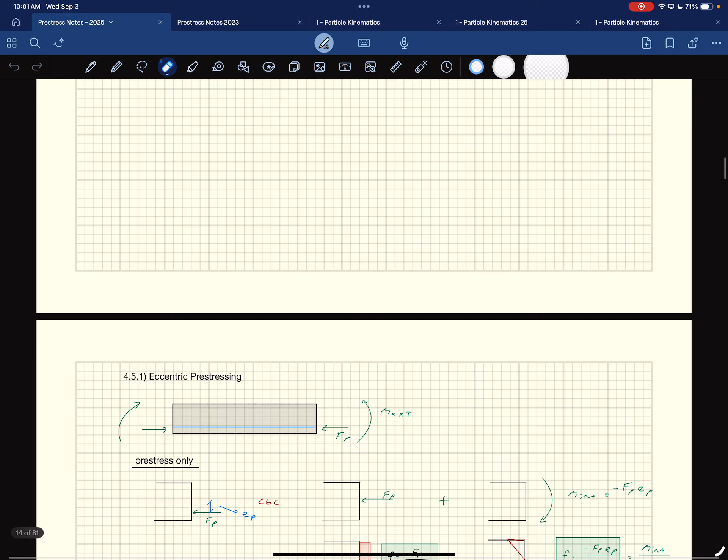So, okay, should we do this? Keep going. I will admit this now, I do have a YouTube page where I'm posting all the recorded lectures. I was going to keep it secret because it's for Neil, since Neil has practice until 10 and comes in late every day. I set this up for Neil, and I was like, I'm just gonna keep it.

Because I ran into a problem - I recorded all my lectures in Structures One last semester. When I had you guys in Structures One, you came to class and did it responsibly, but last semester it was like half the people there at all times. The rest just were like, screw this, I'm not coming. So I was like, fine, I'm not ever doing this again. I mean, I'll do it for dynamics, but anyways, this is the long story.

But I will put it on there. But you guys got to keep coming to class. That happens where, like, Kira for instance is not here today. She had an appointment, so she's like, 'can you record class for me?' I was like, fine, that's fine. And then sometimes you have legitimate reasons for not being here, so just keep coming to class.

Maybe I'll make a wheel. I'll make a wheel for you guys too, an attendance wheel that we could go with, so it'll give you incentive to come to class, because it's better since then we can actually have conversations.

Soonish, we're going to put together a tour. We just do that every once in a while, just for the heck of it. I think what we're aiming for right now is that building downtown - it's a podium structure, they have the timber being put on top right now, it's starting to go up. So sometime in the next couple weeks, we'll probably go to it.

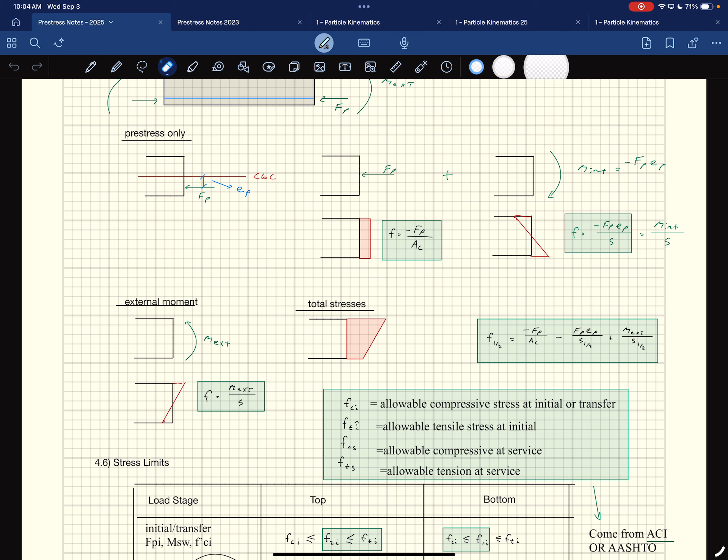So, okay. So what we covered last time, quick little refresher. Basically we derived the equation - this is the equation that we're going to use.

It's the pre-stressing force divided by the area of concrete, minus FP times EP over S, and it's S1 or S2 depending on if I'm going to the top or bottom with my calculations. Then the external moment, again S1 or S2 depending on if I'm going up top or bottom. So this is the portion associated with the pre-compression from our pre-stressing. This is the moment, the internal moment caused by the eccentric pre-stressing tendon. And then this is the cause of the external moment. And that's it - that's the only equation we need to use.

And like I said before, the mechanics are really simple, but where it gets complicated when we do our designs is, one, what do we use for FP? It depends on which load stage we're in.

If we're in the initial load stage, when we transfer the loads from the pre-stressing into the concrete, or when we post-tension the member, this is not going to have pre-stress losses in it. So it's going to be the full pre-stressing force.

Later on, when we're looking at 28 days out or beyond—5 years actually is what we designed for—we're going to use a different FP, the effective pre-stressing force that accounts for any pre-stress losses that happen. So these FPs are going to be different depending on which load stage we're looking at. The other thing that's going to change that we'll talk about today is EP.

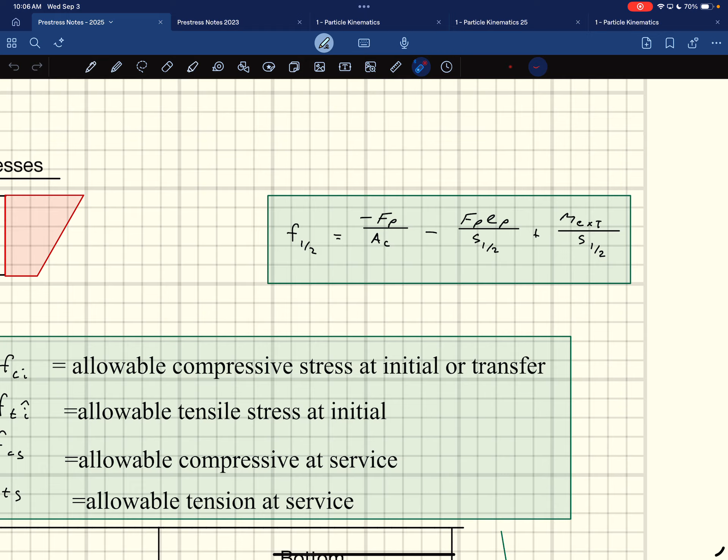The other thing that adds complexity to this is what do we use for comparison? What are we comparing these stresses to? What we're comparing them to is allowable stresses that ACI prescribes, or whatever building code you're looking at prescribes.

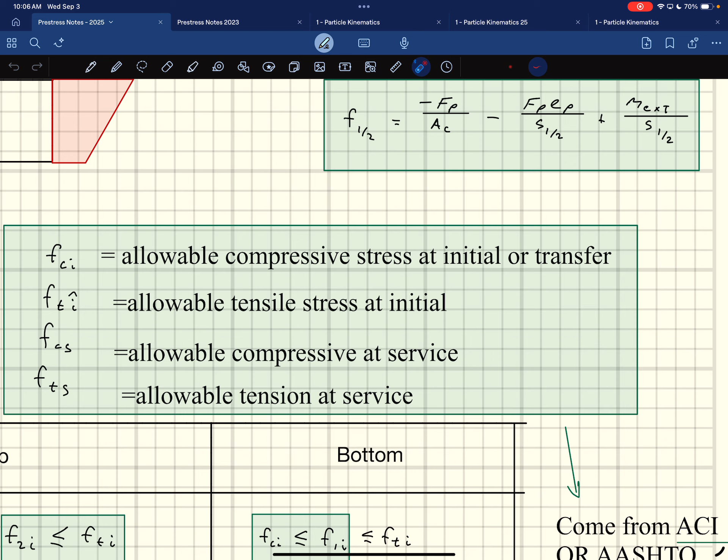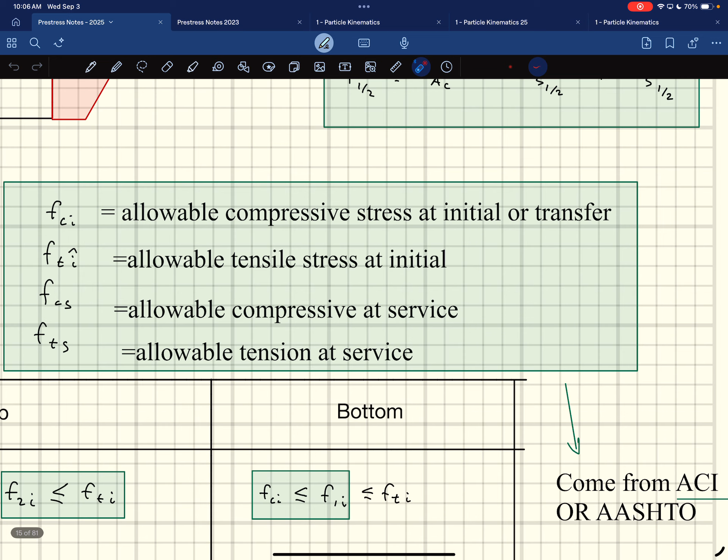If I'm looking at compression at the initial stage, that's going to be FCI, defined by ACI. FTI is what the allowable tension stress is, at the top or bottom, depending on how this thing is oriented, and if it's simply supported or whatnot. This is my allowable compression stress during service loads, and this is my allowable tension stress during service loads.

At every location under both these loading conditions, the initial and the service cases, we have to make sure that our calculated stresses from this equation are more than FCI and less than FTI.

This whole thing takes into consideration that FCI goes in as a negative number, sticking to our sign convention. So this would go in as a negative number, this would go in as a positive number, and then our stress has to be between that negative and positive number. Same thing here—it's the same limits.

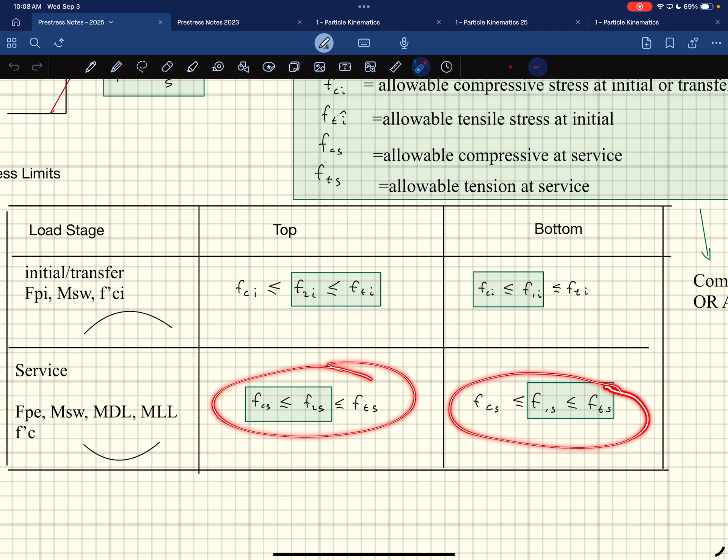These are written exactly the same, but what will control, you could apply a little bit of logic. In a case where this thing is popping up under the initial transfer, what's going to matter is tension up at the top and compression down at the bottom, because this thing is curved up. Under service conditions, again these are written exactly the same, but what would control under a standard case would be compression at the top and tension down at the bottom.

That's it—you always just have to make sure we're within those stresses. And like I said, it gets a little more complicated by all the other stuff that's floating around.

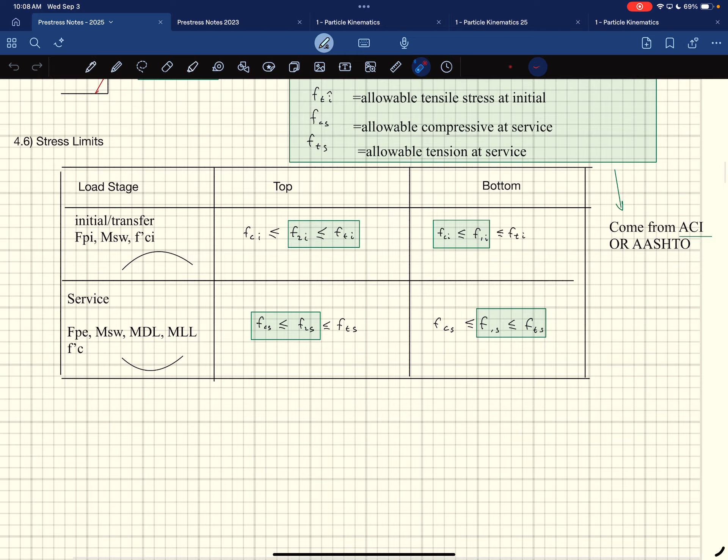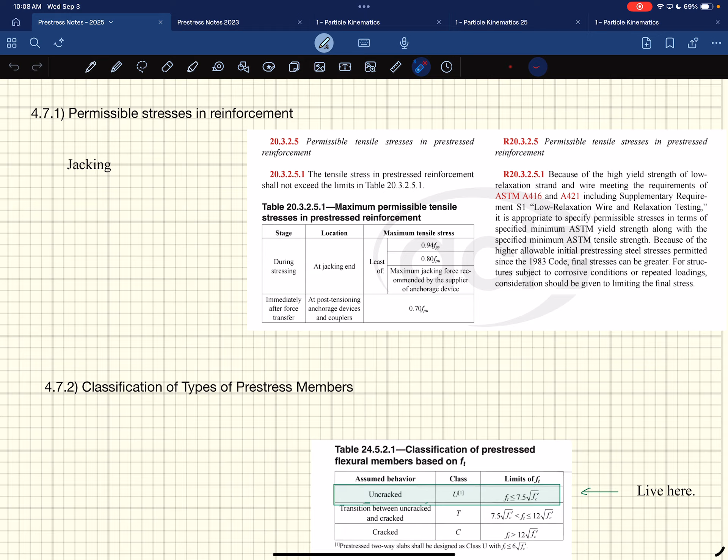So then we went in and said, well, what are those things? We looked at the jacking pre-stressing forces, essential to the tendons. These are the most stresses that the tendons are going to see when we load them up.

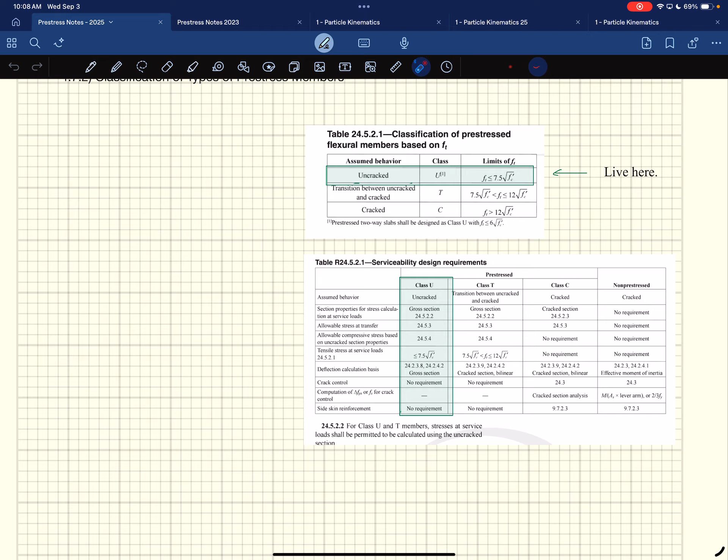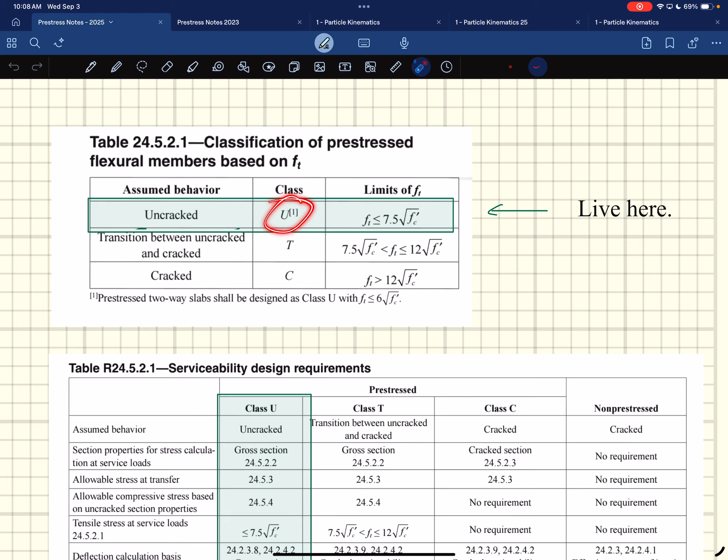Then we went in and looked at classification. We're going to deal in this uncracked case. Depending on your classification, which is based off of your tension stress under service conditions, as long as it's less than 7.5 square root of F prime C, we call it uncracked. When it's uncracked, it tells you how to go about analyzing it, and then we're going to stay away from the class T and the class C.

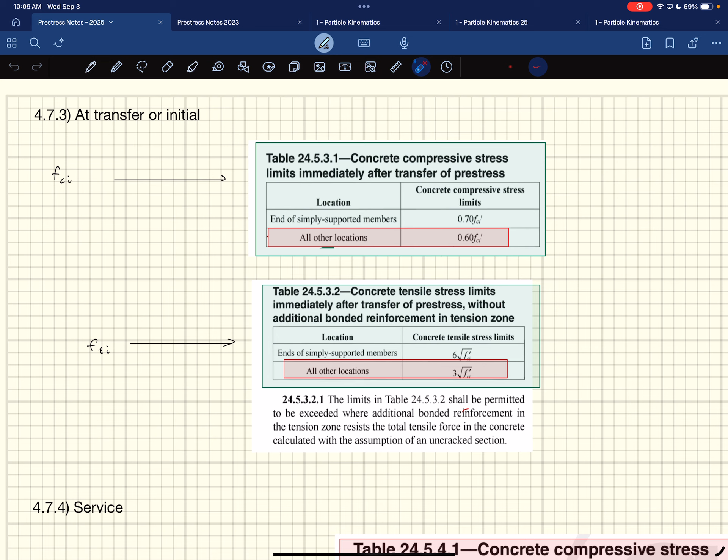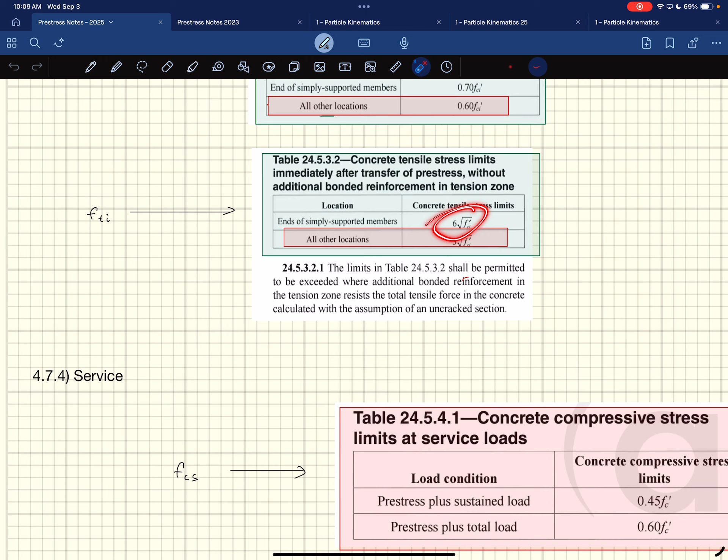And then we went through and defined what FCI is, right? We're going to stay away from the ends, we're just going to do all other locations. That's the 0.6 F prime CI, but near the ends we can go a little bit higher. FTI is again all other locations, but we have a bit higher limit out there. So it actually defines FTI and FCI, and they're both based off of F prime CI.

And now F prime CI even - it's the initial concrete compression strength that we expect to do the transfer at. That would be given to you in the problem statement. Then you would make sure you stay less than 60% of that at the beginning, and you would calculate 3 square root F prime CI to determine what FTI is. And again, when you see the square roots, that F prime CI has to go in PSI - you gotta be careful of that.

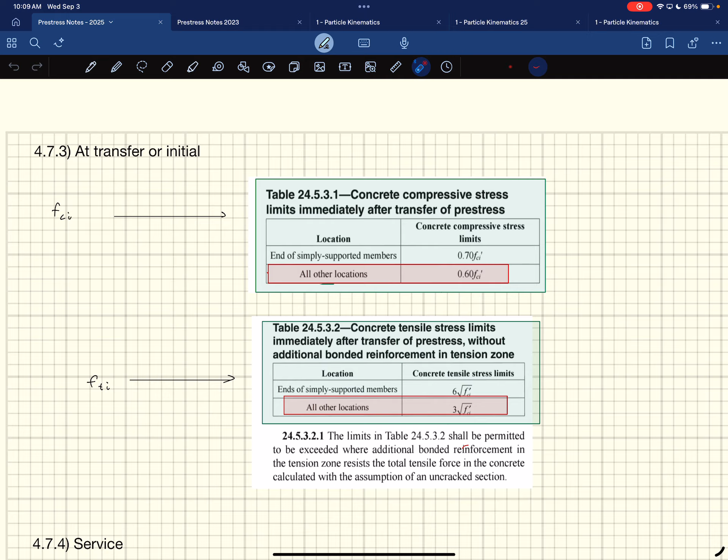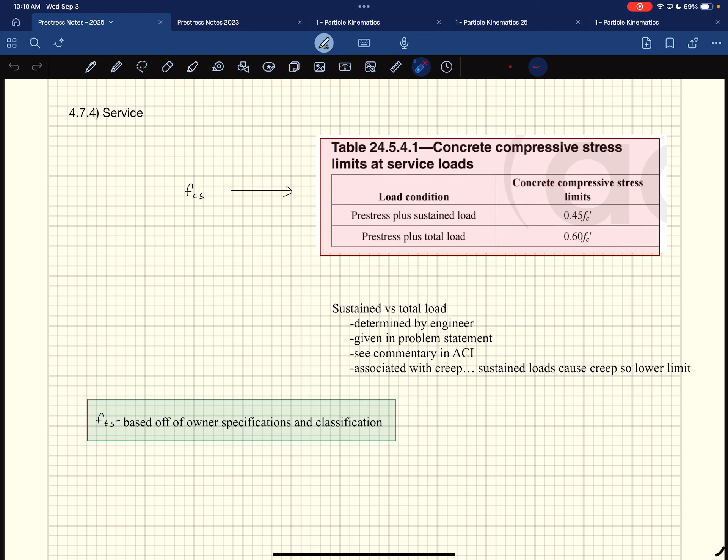FCS has 2 different limits depending on if you have sustained load or not. We have a lower limit for the sustained load because of creep, and a higher limit when we take into consideration the total load, because that includes the live loads that come and go and aren't there constantly. So those are the allowable stresses - we just need to make sure we stay within those limits. I'll show you, we're going to dive into actually analyzing one of these in a second.

Okay, so we have basic strand patterns: straight, or standard, just as a constant EP.

What up, Neil? Mike. How you doing?

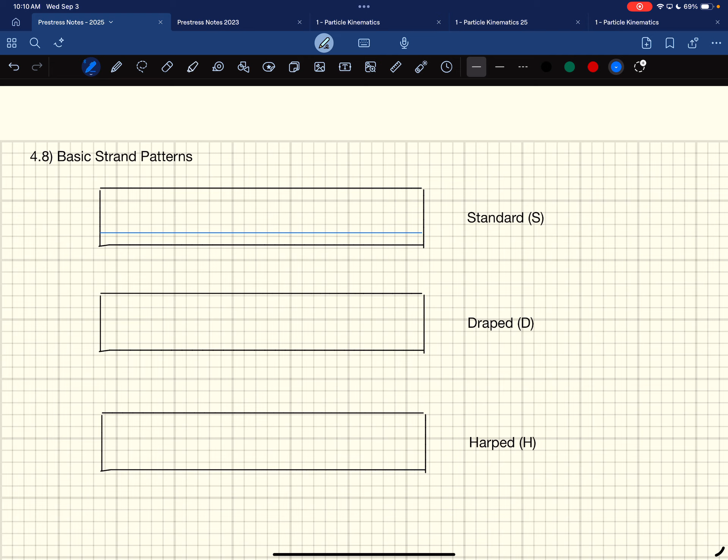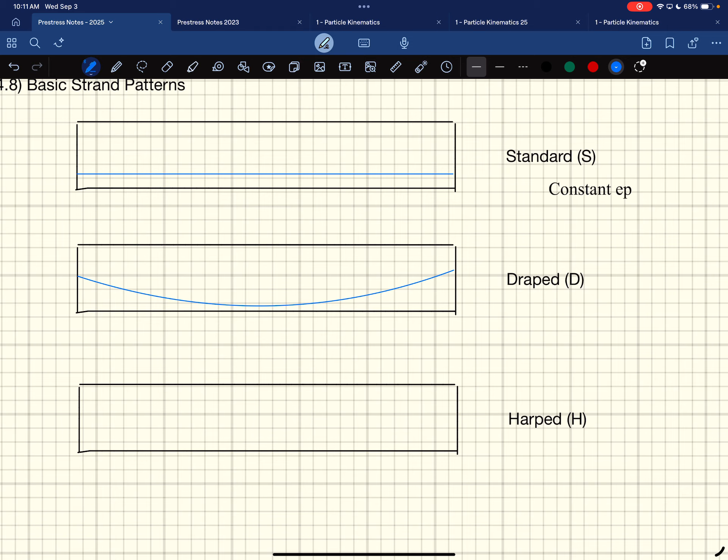Draped, like that. And I think we're going to estimate that as like a parabolic shape, like in a lot of equations - it's not really a parabola. It's a funicular shape, the shape that a cable would take if you draped it between 2 points, letting it sag as it goes. It's not a parabola, but it's close enough. Some nerding out there a little bit - funicular.

This obviously is post-tensioning. It's important to note you couldn't make this shape with pre-tensioning. With pre-tensioning, you stretch it first, then cast the concrete. You can't stretch a cable into a curve - I mean, you could try, you could put a bunch of tie downs along the length of this thing, but it would still be straight lines in between each one. So this would be post-tensioning.

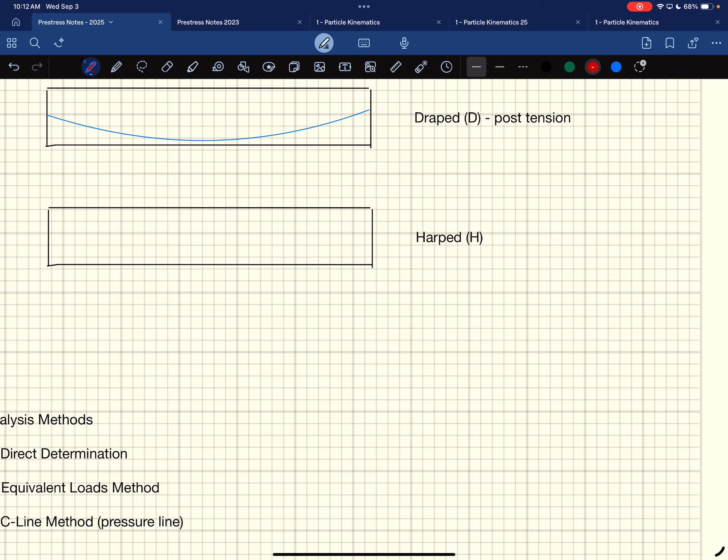And then we have harped as the last one. There's a couple different harping methods, like this. You can also do it where you just have one harping point, right in the middle.

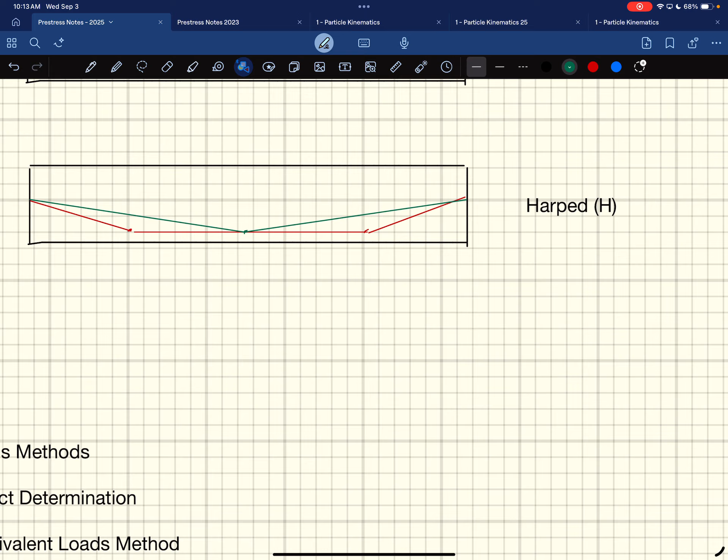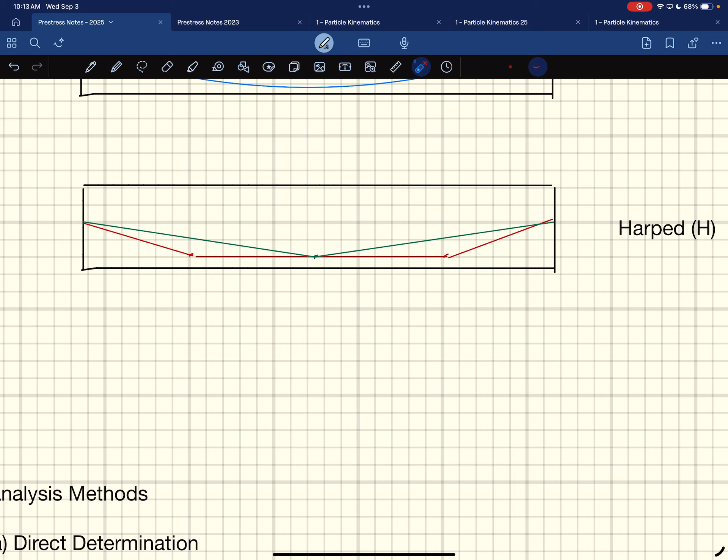You have a couple different depression points, where you hold it down, and you could do that. You can imagine doing that in a pre-stressed plant - before you cast the concrete, you just put some big tie downs right here, and then you pull this sucker. But imagine the forces you're going to be getting at this location - there's massive forces when you do that. When you're pulling on this thing with millions of pounds in this direction, it's going to want to shoot up, so you have to hold it down.

Like I said, there's a pre-stressing plant in Billings - we've toured that a few times. And the people at the plant don't like it because it's really scary. You can imagine, millions of pounds, and if this anchor fails and this thing shoots up and chops people's heads off. I don't know if it actually ever has chopped anyone's head off, but I wouldn't want to be the first.

We've talked about this - I was a big TikToker for years, and then it was too good, it really sucked me in. I was just like, oh my God, this is too engaging, and I had to quit it, I had to quit my TikTok. And the algorithm was bringing me towards this extreme political content. I hated it, so I was like, I'm off, and I switched over to Instagram Reels because they suck.

They suck. But then immediately I started getting some of the craziest shit on my Instagram Reels, where people were getting their heads chopped off, or crashes, lots of shootings. You just watch people get shot on the sidewalk, going off big ramps and wrecking terribly. What the fuck, right? I had to keep saying, I don't like this, I don't like this, I don't like this. Now finally the algorithm has gotten to a point where I don't get those death shots anymore. But I was like, shouldn't this be illegal? Am I supposed to be seeing people die all the time?

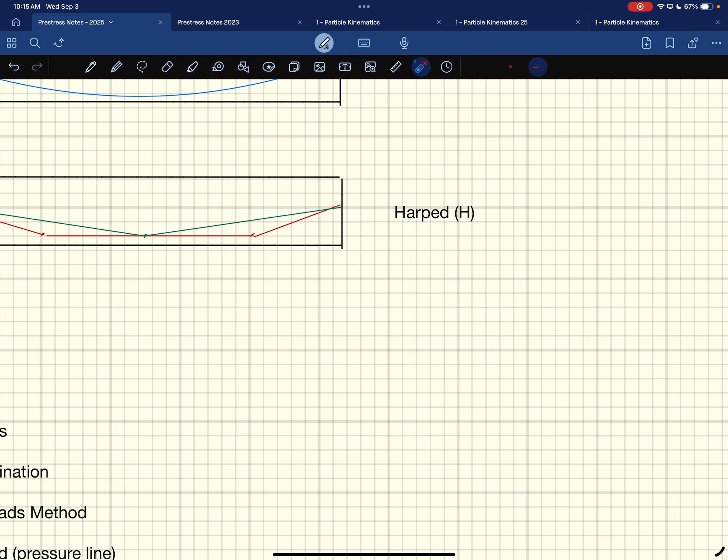I got this one page that would show an accident. I went and looked, because I got the reel and then I went and looked, and maybe that's why I kept getting them, because I kept engaging with them. It would show a fatal accident, and then right before the fatality happened, it would cut away. You'd see it happening, but they don't actually show it. I was disturbed for so long seeing those ones. There's one where a guy was dealing with these big wheels and tires on top of his trailer, and he was overdoing something with it, and it fell off and swung around and squished him, but it cuts away right before that happens. So it was like, oh my God, what's the next one look like? And it just kept going.

That was too engaging. But now, part of the reason my algorithm has been corrupted, it's been helping too. I got rid of that stuff. It's because my wife constantly sends me reels, and her reels suck, they're terrible. But they corrupt my algorithm, and they're also very wholesome.

I'll give you an example someday, I'll find one she sends me. My kids won't open reels from their mom because they don't want their algorithm corrupted by their mom's junk stuff. But I take it for the family and look at it anyway. It's like, all right, here we go. That's funny. That's a good one, I'm gonna send this recording to her.

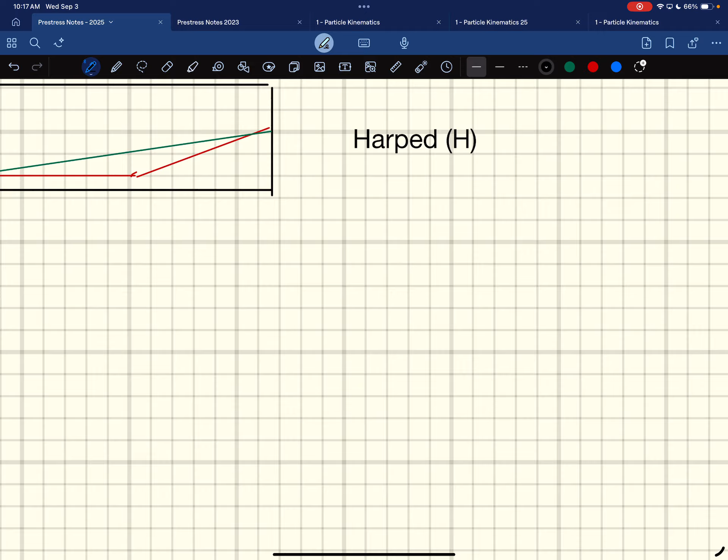Yeah, we had a term for that. I forget what it was.

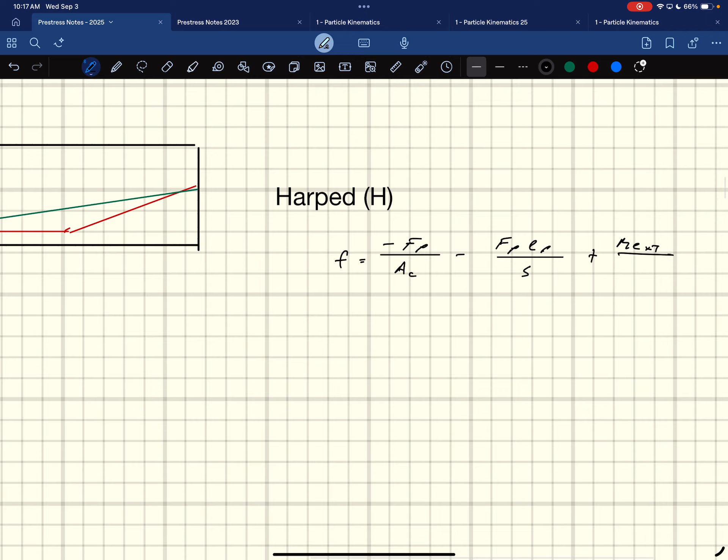All right, so just to write our equation: this is F. Why are we doing this? Right, why are we doing this? This is FP over AC, minus FP times EP, all over S, and then we're adding on M external over S. And I mentioned this before, what we're doing is we want these to cancel out.

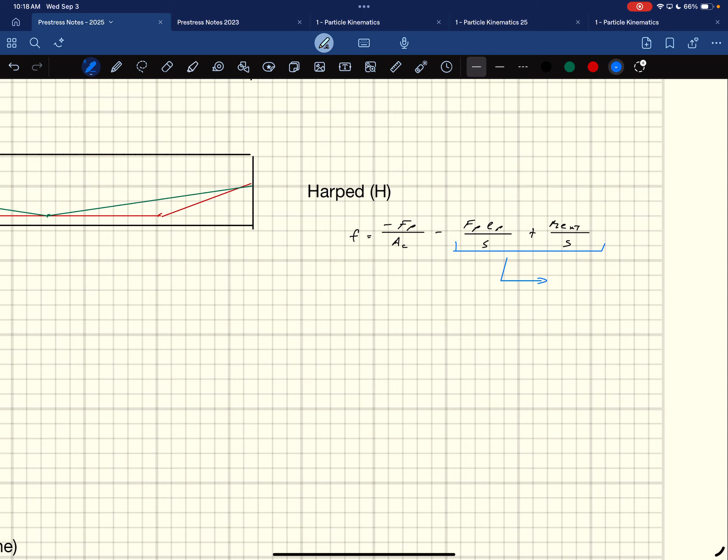Because again, what I want is the pre-compression force. But ideally, if you could do this perfectly, I want my external moment and my internal moment to cancel out, so that I'm just canceling out the effect of the external moment. Because if I do that, then I'm not going to get any tension. The only thing left is compression along the whole cross section.

Well, what does our external moment look like? Our external moment actually looks like this, under a standard simply supported case: it's a parabola that goes this way. So if I make my tendon go like this, EP, it'll basically make it so those two cancel each other out—my external moment, my internal moment cancels out. If you're doing pre-tensioning, I can't make this shape, but I can do this: I can make it more eccentric where I need it more eccentric, and less eccentric where I need it less eccentric.

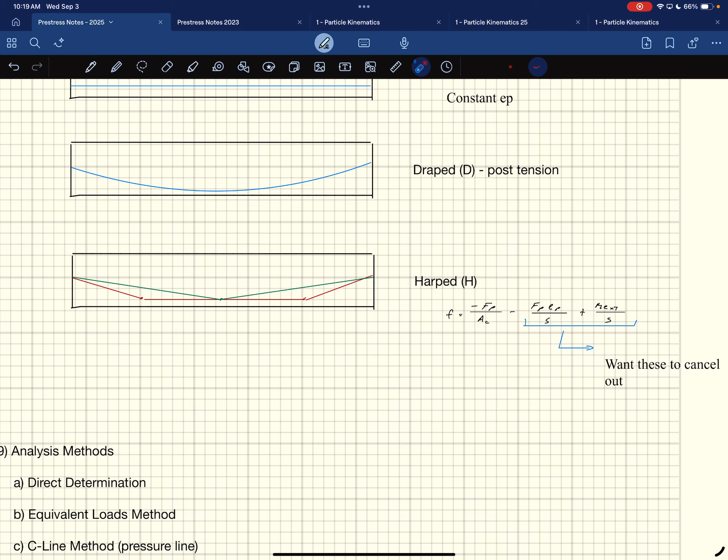And we get these two things to cancel out. And that's great, right? I want to cancel out. I mean, this will do it. We put it down at the extreme location right there, and this is going to do it. Where it counted the most, my internal moment and external moment would cancel each other out.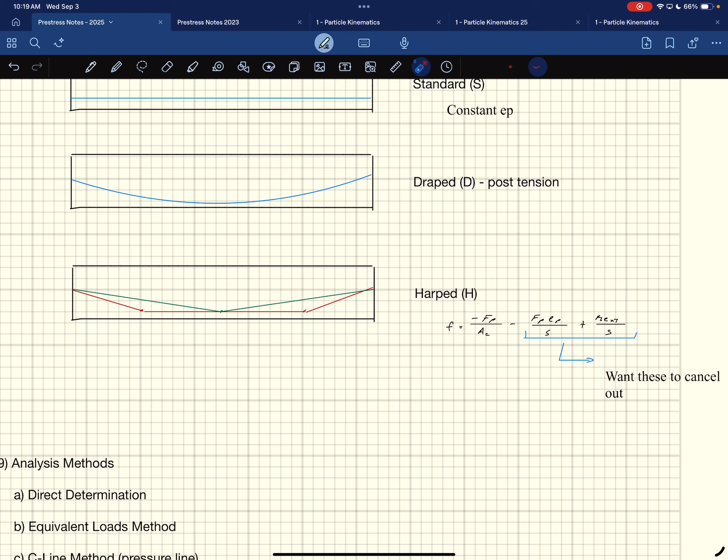Where you actually can run into problems is near the ends, because over there isn't much external moment, or the external moment is really small. But I have this pre-stressing tendon out there that's trying to cancel these things out. Well, if this goes to zero and this still exists, I can run into some problems, like cracking up at the top at the ends, because I don't have the external moment to cancel it out.

I don't have my moments shaped like this - I have no moments at the ends. If I don't have any moments at the ends, and I have this big pre-stressing force saying you need to pop up, I could get cracks at the top near the ends. Near the middle it's fine, but near the ends I could run into some problems.

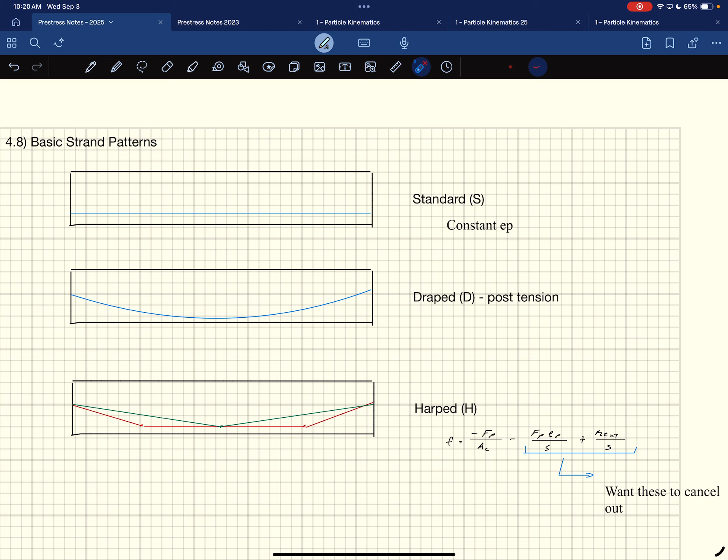And there's some ways to avoid that - we just have that thing change. Have it have no eccentricity at the ends, and then have a major eccentricity in the middle, right? And that's what we do. I think a lot of times, though, they do get designed as straight just because it's easier, right?

If you're making these things in a pre-stressing plant, just make it straight. What do they do in post-tension floors? Remember I said that the ducts and the pre-stressing tendon are kind of one unit. What they do is they lay it out on a floor, and sometimes it's going over a bunch of beams, so sometimes you want positive, sometimes you want negative, and they just literally lay it out and drape it as they go across, and come back and cast concrete around it. In one second, I'm gonna show you.

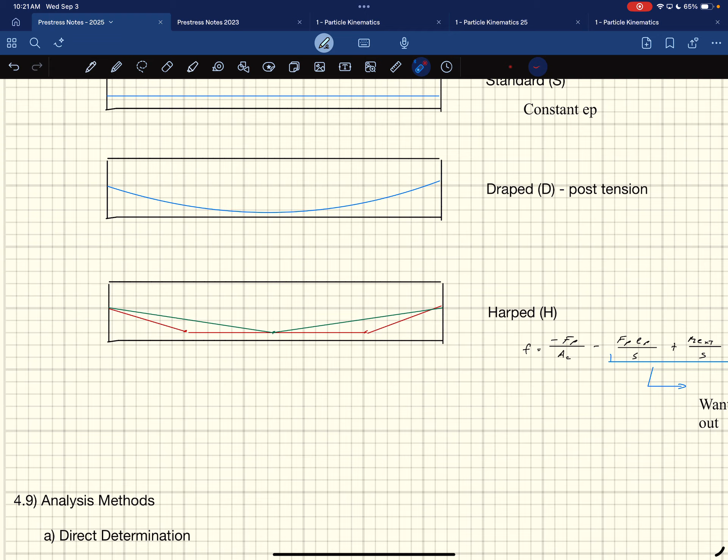Axel, you remember Axel? All the way from last semester? What's crazy though is I say that, and those of you that had classes with Axel, you know Axel. Those of you that didn't, like some of you, Paige, do you know who Axel is? See? It's how quickly you get forgotten around here, right? I'm serious, that's really strange. We've had professors here - Ted Lang was a professor here for 50 years. You guys don't even know who Ted Lang is, right? And he was forgotten within the first years. Everybody's like, I don't know who Ted Lang is, because you guys are always changing, right?

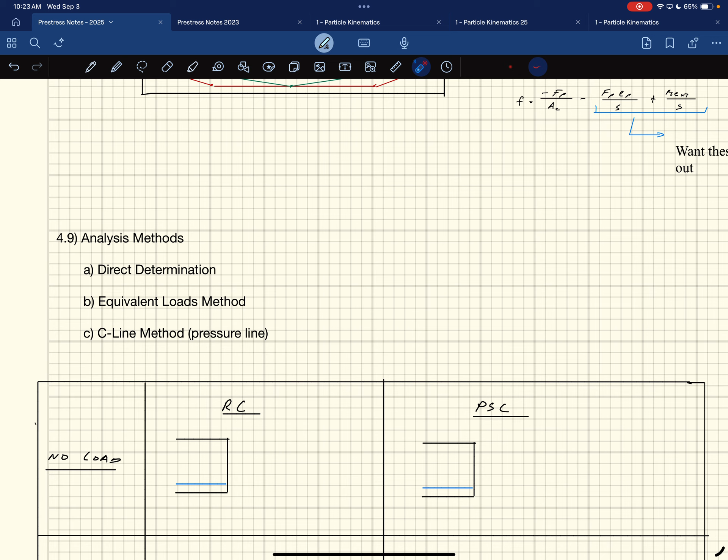Relevant. What we do is relevant. That was my establishing point. This happens, right? So they're going up and down as you go along. And the moving them up and down is still doing this, because what's happening is my external moment is going positive, negative, and so my EP is going to go below in some cases, above in others, as it goes across.

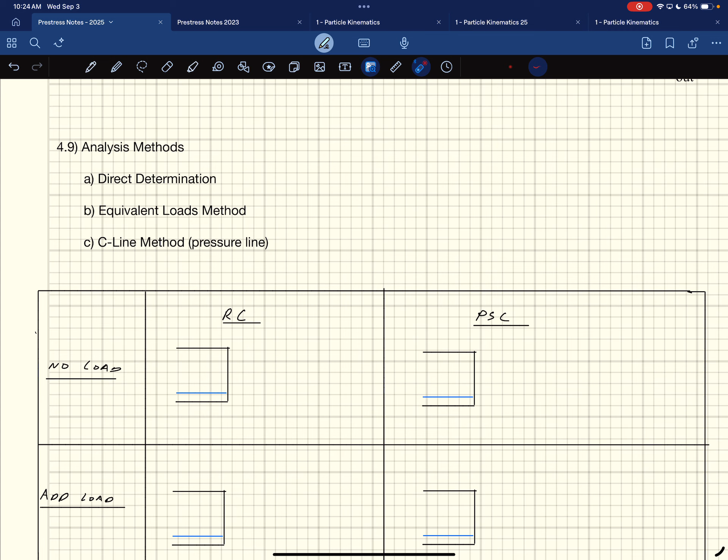Okay, so how do we analyze these things? There's a couple different methods here. We're going to briefly talk about it. We're going to focus mainly on this one. This is just analysis, not design at this point. We're going to do direct determination. That's actually what we're going to do. We'll talk a little bit about the other ones too, just to lay them out so you know they exist.

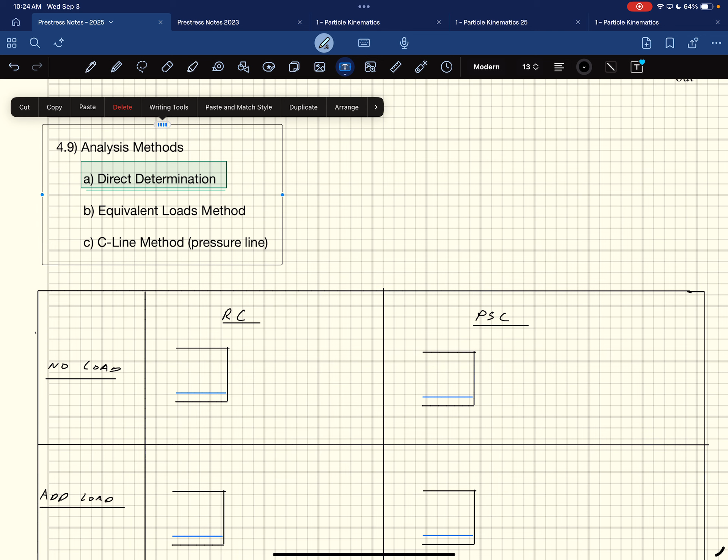Use equations from above to calculate stresses along the length, at different load stages. It ends up with quite a few lines for this, but we use equations above to calculate stresses top and bottom along the length for different load stages. And you can imagine this is going to be a plot of stresses as a function of x.

We're going to do this in a minute. I just wanted to give some foreshadowing, because they're changing along the length, and so they're going to have that, okay?

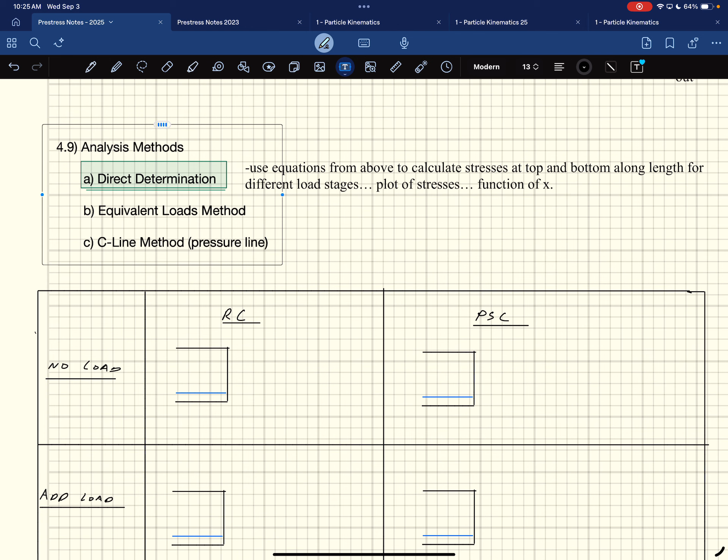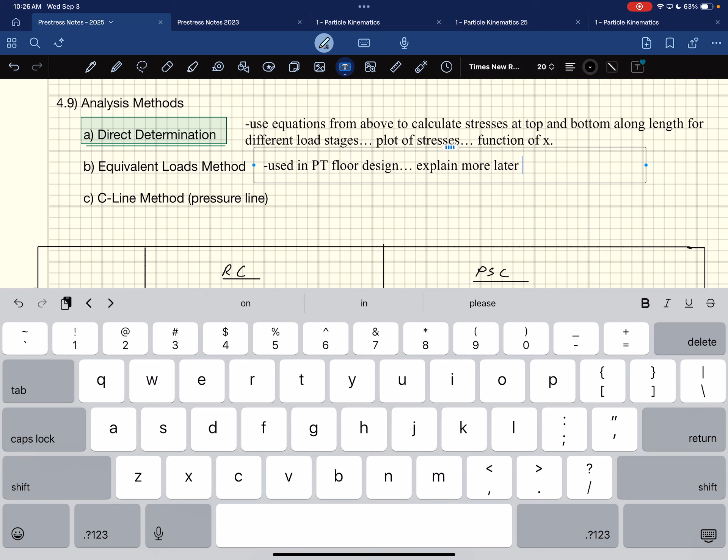Equivalent load procedure: this is used in post-tension floor design, PT. We'll explain more later. What that does, as the name implies, is it comes in and starts talking about what could be an equivalent load that would give me these same moments. An external load, you pretend that there's some external load, so when you analyze it, you just add in this extra component, like another distributed load. It's not really there, but it's a distributed load acting in the opposite direction.

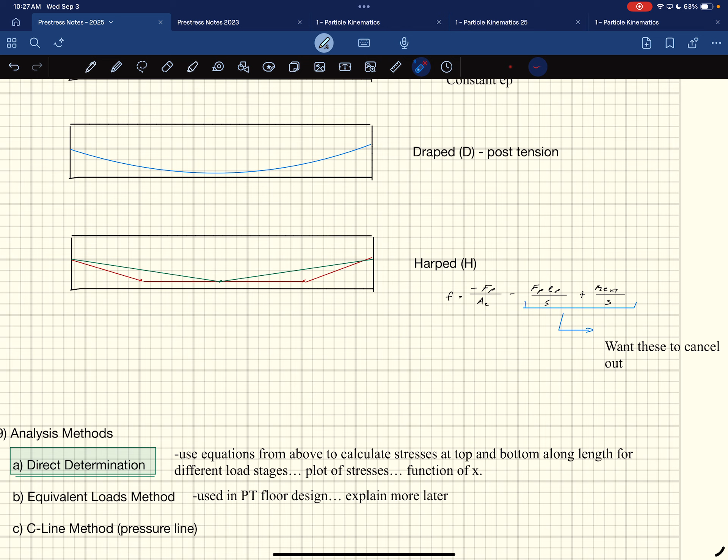For this case, we could say this pre-stressing is going to cause a parabolic internal moment. So you would come in and say, let's just pretend that's a force, a distributed force with an upward magnitude that would cause that same thing. There's some reasons for doing it - we're going to get into more detail later - but it has to do with trying to analyze things with finite element analysis. Finite element analysis doesn't know how to handle a pre-stressed member, but it does know how to handle external loads. So what we do is pretend that there's just an external load that causes the same moments that this thing would cause, and we go from there.

Getting ahead of ourselves, okay? And then there's also this last one. This used to get used a lot, the C-line method. And a few years ago, people thought it was really funny because they kept thinking I was saying sea lion, like a sea lion method. So now I say sea lion on purpose. Right? The sea lion method.

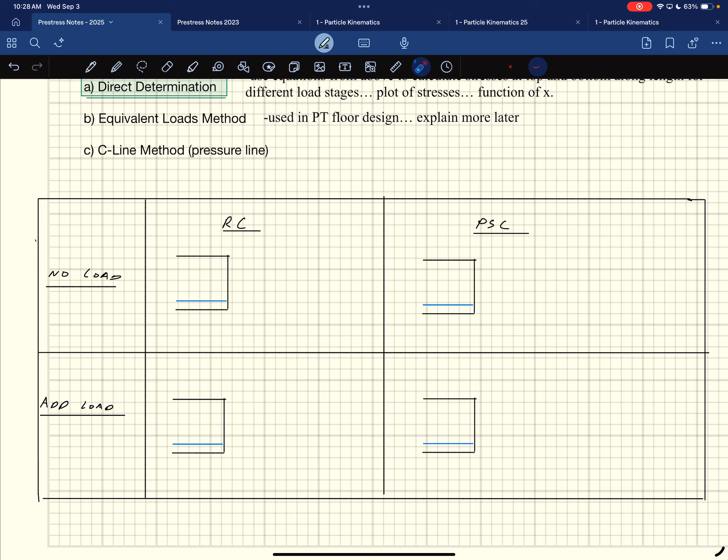Shit! Oh man, shots fired! Oh God, I thought you were setting up like a pun. No, I'm really curious. I look at it and think, oh, look, it's a seal. And then it's a sea lion, dumbass. Anika's probably the one yelling at it. It's funny because I do the same thing, like when people go to Yellowstone and say, oh look, there's a wolf, and it's clearly a coyote. I'll pass judgment on that, but you don't pass judgment on me, Anika, all right?

Same thing with a llama versus an alpaca. You guys know the difference between those? They're different animals, I know this. But could you actually look at one and tell? If I put them both up there, you'd be wrong, Neil. I look at alpacas all the time over by Granny's Donuts. How does it look different than the hump on a camel's back? Not a camel, I'm not a camel. A llama and an alpaca - I know the difference between a camel and an alpaca, but I'm not sure about a llama and an alpaca. They have different feet, I'm pretty sure. Also a llama's bigger than an alpaca.

Maybe next time I'll set up a little quiz for you guys - maybe that'll be on the exam. There'll be a picture of a sea lion and a picture of a seal, and you have to identify which is which. How do we trust that your key is right? Yeah, AI. And then we'll do the same with llamas and alpacas and see if you can tell the difference. That'll be on the exam. Is that extra credit? There'll be pictures - maybe a llama, a seal, a sea lion, and an alpaca, and you have to match which one is which. And a camel, I'll throw a camel in there too, Neil.

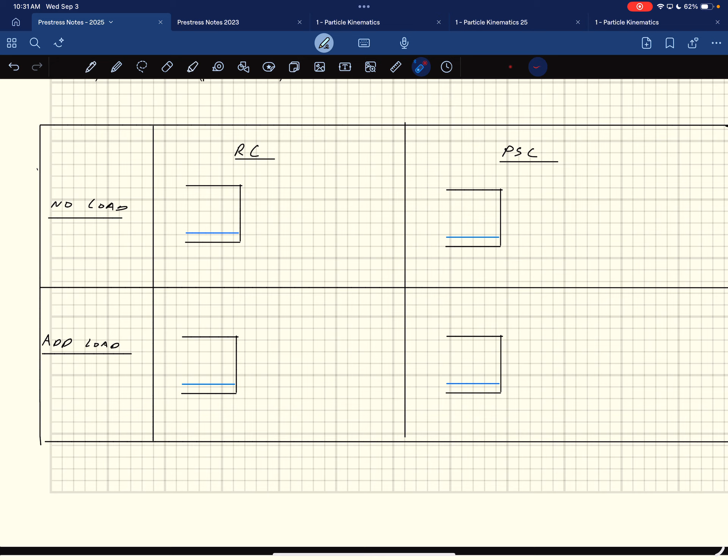A wolf and a coyote. A bison and a buffalo - what's that? Bison and a buffalo, they're the same, aren't they? Well, but we call them that, we use them that way, but we're wrong. A bison and a buffalo. A black bear and a grizzly - that's the hardest one. You should make it black bear and white too. What about cinnamon? Black and white for the... oh, black and white. What's that, Anika? A cinnamon bear and a brown bear. Yeah, grizzly would- yeah, grizzly. Oh yeah, this would be a great exam, it's gonna take a lot of animals.

Okay, so back to the sea lion method - okay, we're not actually going to use a sea lion method, but what I like about it is the discussion leading up to it, like the difference between regular reinforced concrete and pre-stressed concrete. They used to analyze pre-stressed beams this way. We don't do it anymore, because now we have computers and can do Excel plots or MATLAB plots of stresses really easily, so it's super easy to just do the regular method. But back in the day, when they didn't have those tools, they came up with other ways to picture what's happening.

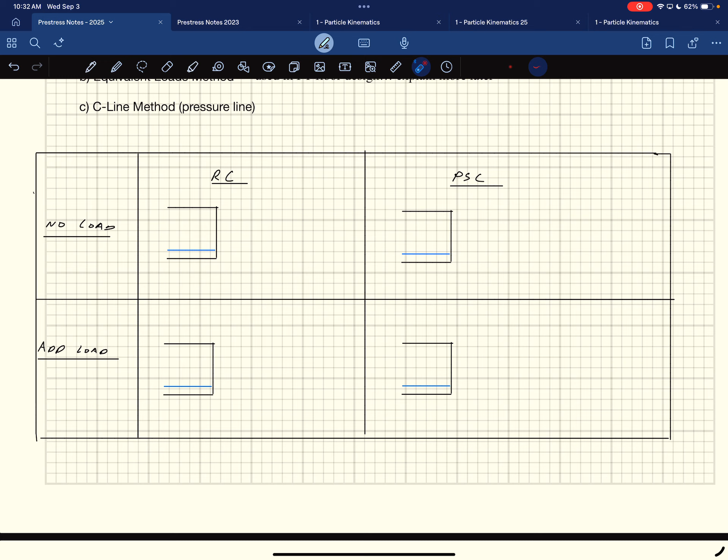So what we're going to do is compare reinforced concrete to pre-stressed concrete, that's PSC. We're going to look at no load, and then we're going to add some load to it. With no load at all, what are the stresses in the reinforced concrete beam? Nothing, right? It's just sitting there, it's passive. Obviously there's self-weight and stuff, but without any load, no self-weight, if you just put a concrete beam on this table, completely supported along the length, it just sits there. Nothing happens to it until I add load.

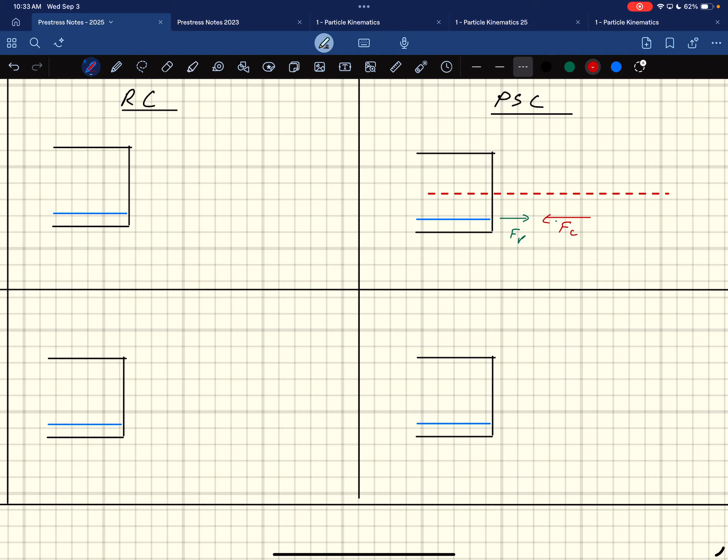Whereas a pre-stressed concrete beam, that's not the case, because they're preloaded, right? So it has some stresses to begin with. We've got FP, we're pulling on that pre-stressing force like that. And then equal and opposite is going to be FC, the resultant compression forces are going to be like that. And we've got the CGC in here, CGC floating around right there. This distance right here is what we're calling EP, dash line.

My eccentric pre-stressing force - this is what we call EC. If we were to calculate it: if I took this steel, stretched it down at the bottom, cast concrete around it, and released it, there'd be this massive pre-stressing force causing this. FC and FP have to be equal to each other.

FP has to be equal to FC, because the system has to be in equilibrium. So FP and FC are equal and opposite to each other.

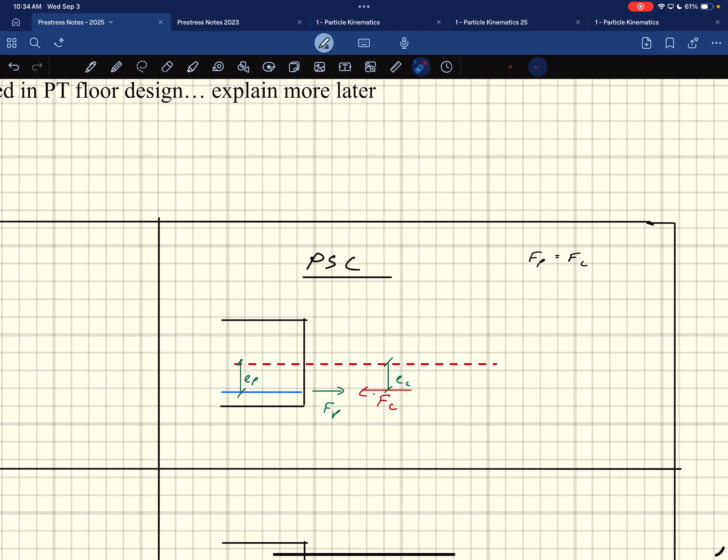Okay, so EC, EP - these things line up. They're right up next to each other, they have to be. There's no external moment. If FC didn't line up with it, if it was up here, there'd be a moment. At this point, there's no external moment applied to it.

So FP is equal to FC, and then also EP is equal to EC - the eccentricity of both of those things. If I was to find the central location of this, and add the EC to it, it would have stresses that would look like this. You could figure out where the resultant from these stresses would be, and that resultant would be lined up directly with that FP.

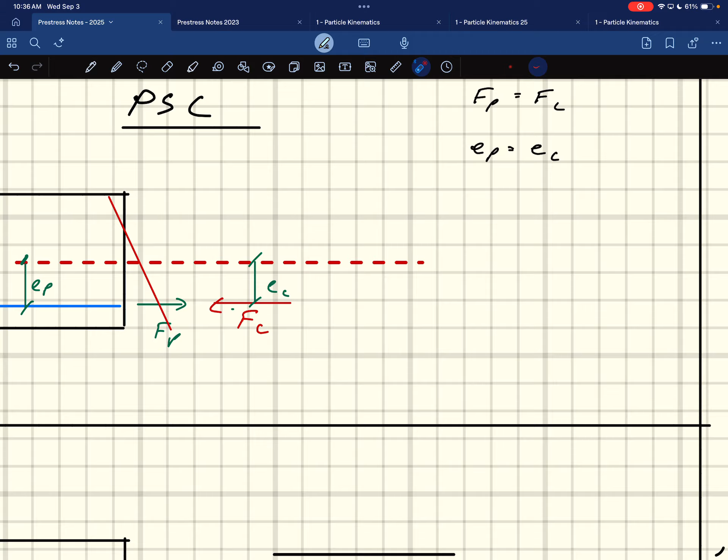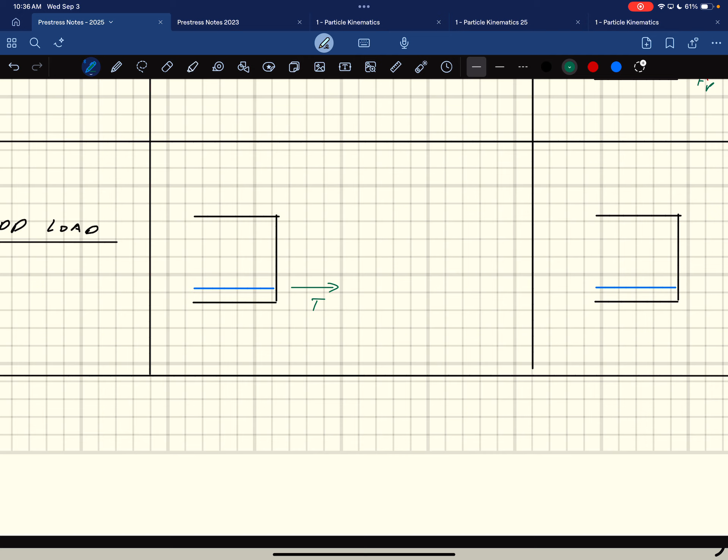But then if I apply load - that's what happens when we have no load. When we apply a load, as our load goes up, in regular reinforced concrete what we get is this: down here at the bottom we get T, and now I'm going to get a compression force up at the top too. C and T - in this case C is equal to T. That's fundamentally what we do in regular reinforced concrete.

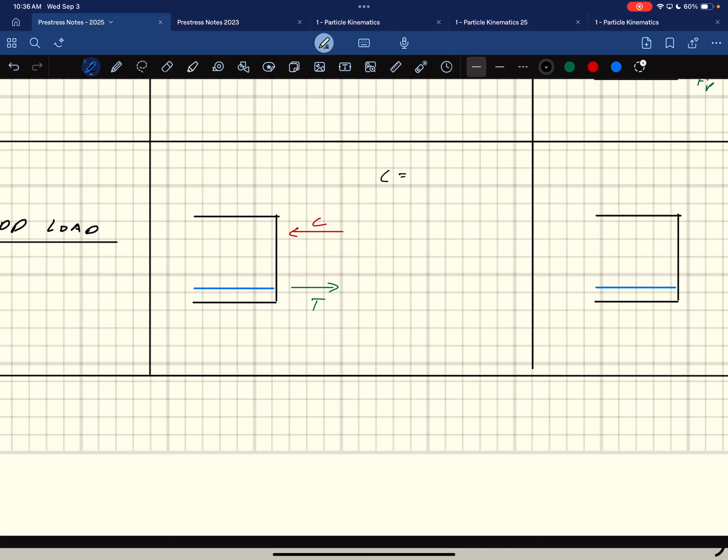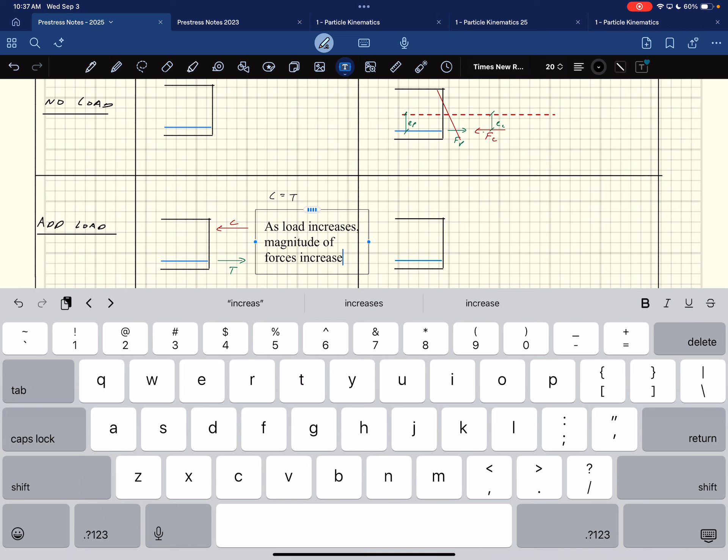But then the other thing that's happening, as load increases, the magnitude of forces increase but they stay in the same location. So to resist the load when you apply moment to the reinforced concrete, C always has to be equal to T because there's no other forces happening there. The moment comes from C and T getting bigger - C gets bigger, T gets bigger, up until it yields, and then T and C flatten out. Generally speaking, they stay in the same location and the magnitudes increase as we apply the load.

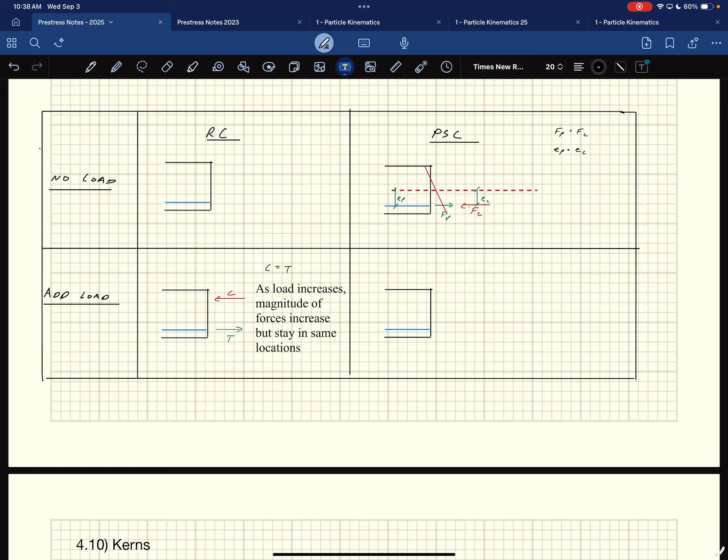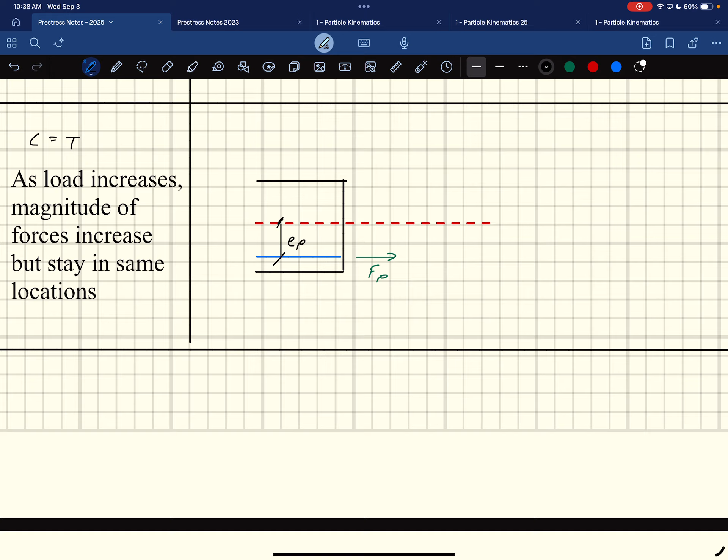With pre-stressed concrete it's different. Same things applied here: my FP is going to be down here, the pre-stressing force going like that, and we've got my CGC going down the middle again. My EP is fixed - it can be changing in height, but it doesn't change as we apply load.

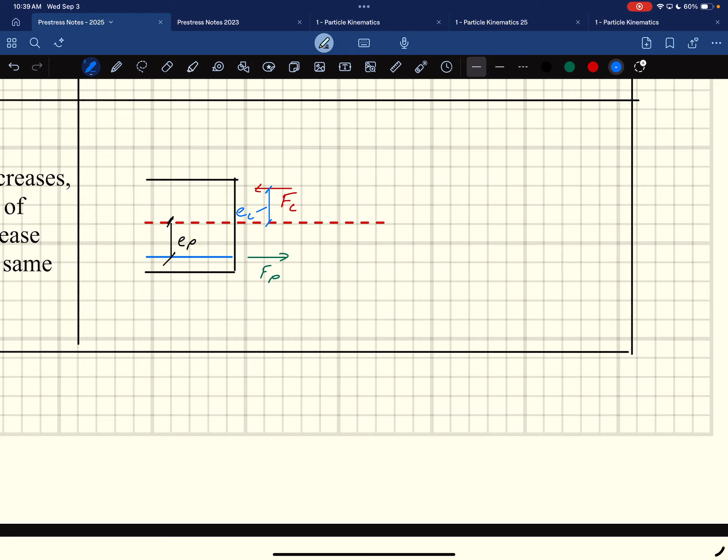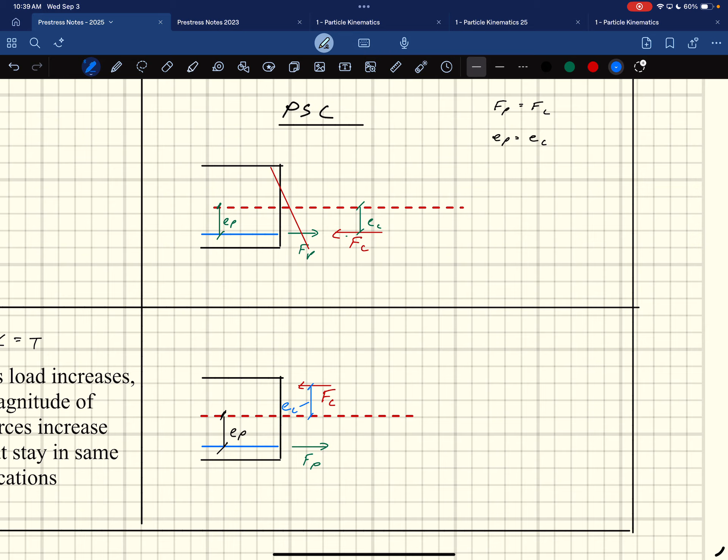But then what does change is now my C will move - my FC will move, and my EC changes then, as the load applies. So what happens is it starts out where they're lined up, but as you apply load, that FC moves, because it has to resist that moment, and we do so with EC becoming eccentric.

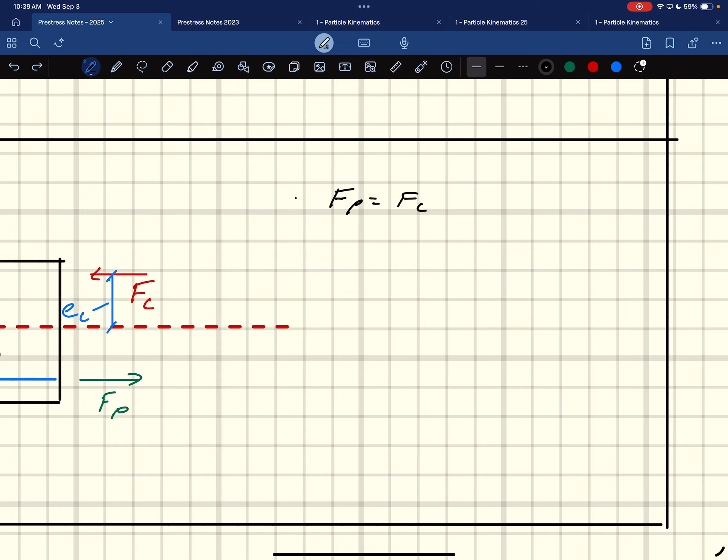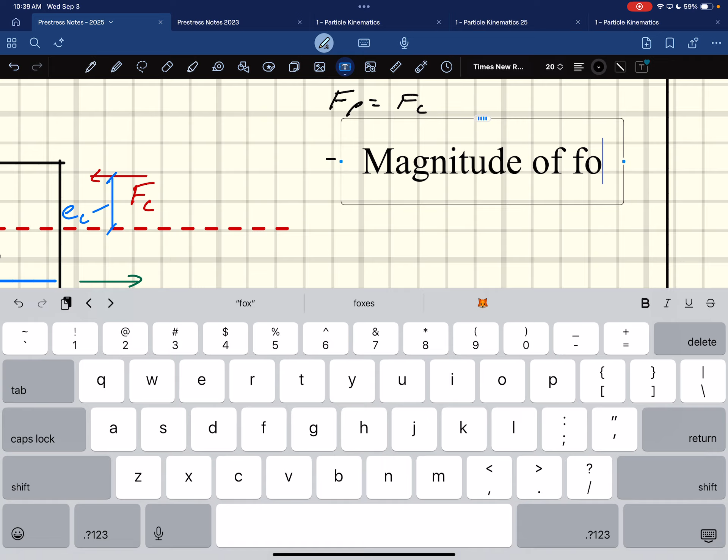So in this case, to summarize: FP is equal to FC, always has to be equal to FC, or negative - equal and opposite. But what doesn't change, as we said before, is the magnitude of forces - they stay the same, but the location of FC changes, EC changes.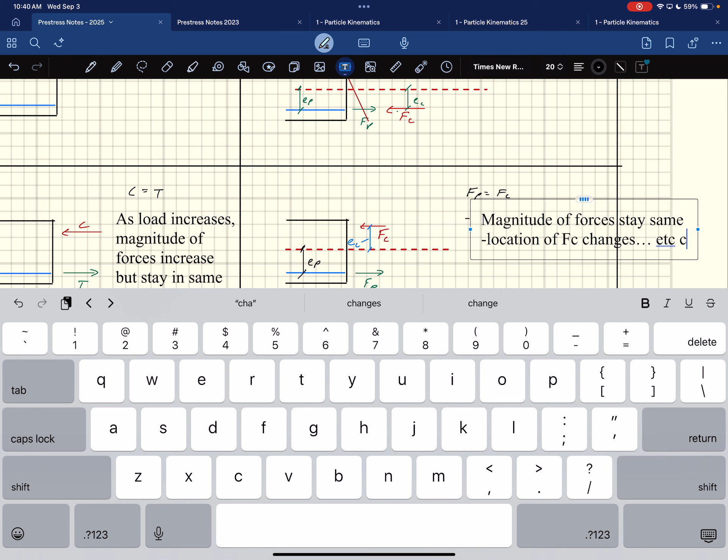Okay, so that's the difference, right? Instead on the left-hand side, C and T stay in the same location, but they get bigger. On the right-hand side, FP and FC stay the same, but the location of FC changes, right?

And the reason we say this doesn't... I mean, does FP actually change? Yeah, it does actually change, but not that much. Remember, one of our assumptions was that the applied moment doesn't cause a change in it, right?

And so you can actually calculate what that EC is. You could do this: if M external is equal to FP times EP minus EC, right? So if I wanted to figure out the moment caused by FC and FP, it's either FP or FC, times the distance in between them. And the way we have our naming scheme with positive, negative, this is the equation you actually would use, right?

And so if I wanted to calculate where EC was, I could use that equation right there. I say EC is equal to EP minus M external divided by FP. Right? And so I could calculate what EC is, and I could actually plot EC along the length.

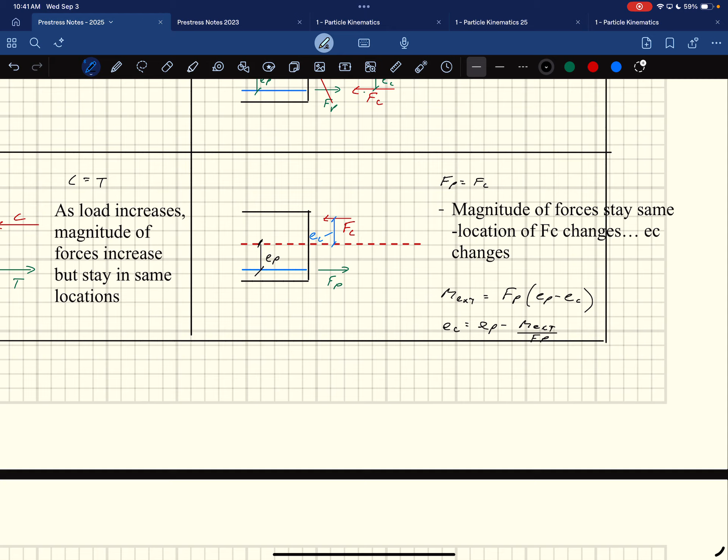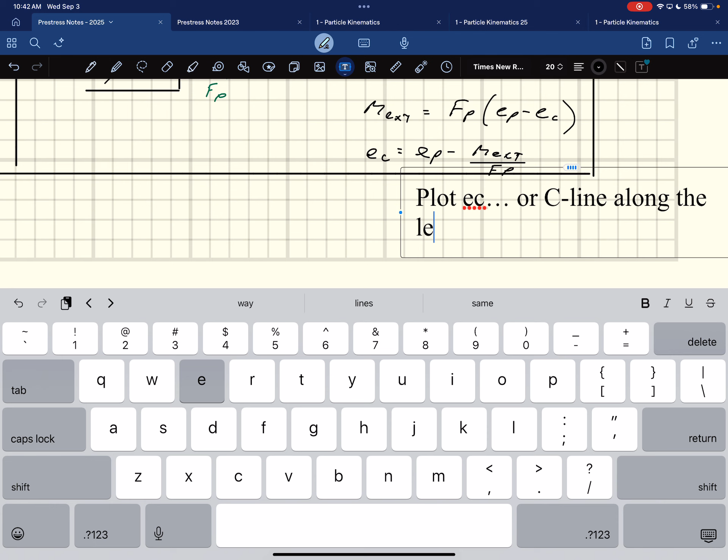And that's what they used to do when they did this evaluation: they would calculate what EC was and then plot it along the length, plot EC or the C line along the length of the beam and compare it to limits. That's why it's called the C line method, because we plot where the C is at, right?

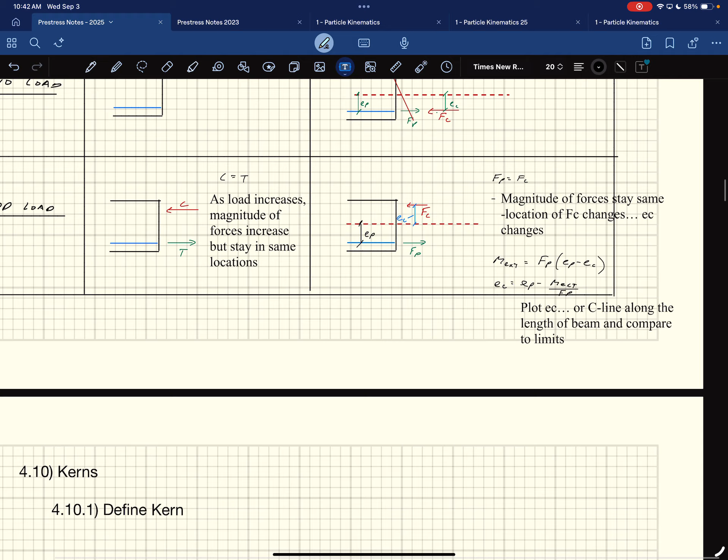One thing I want to note about doing it this way that's actually pretty interesting is where this FC acts. Otherwise we would never talk about this, but what's really weird to think about is that a pre-stressing member, and this happens sometimes, if you cast a pre-stressing member and let it sit in a yard for too long, it'll creep, but in a way which is really weird, it'll creep up. Isn't that weird to think about?

You say, I'm going to cast this pre-stressing beam, and they put it in my yard. It doesn't get put into application where it starts getting all the loads. It just sits in a yard for a year or two or three, and they want to use it later, but they can't because it's crept up. You've designed it to have these loads on it, and the loads aren't there, so it pops up and creeps up. And that can happen in service too, where you put it in service and then you get the creeping again, as the concrete in compression squishes too much, and then it can pop up on us.

And it could also creep down, right? If you put enough loads on it, it'll creep down. If the compression force is in a location, you're going to get the creep where it shrinks, and then it'll creep down with time, which is more how you'd think of it as opposed to creeping up. And what defines if it's going to creep up or down is dependent upon where FC is at, right?

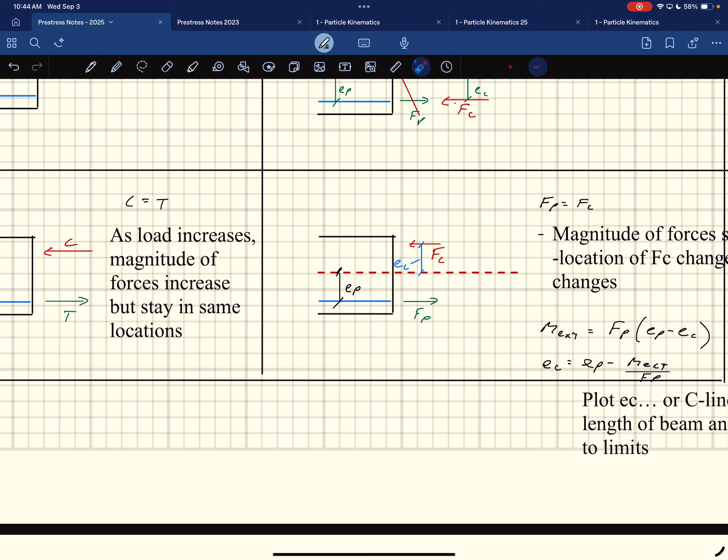If FC is below the neutral axis, right? If my FC is down here, which way is it going to creep? If my FC is down here, up—it's going to creep up, right? Because you're going to get shortening, the bottom here is going to get shortening, and so it's going to creep up. If my FC is above the neutral axis, then it's going to creep down, right? That's just different. This is the one place where we see it at play here, where this FC is, right? And we can make note of that.

If FC is above C, G, C, it creeps down.

If FC is below C, G, C creeps up.

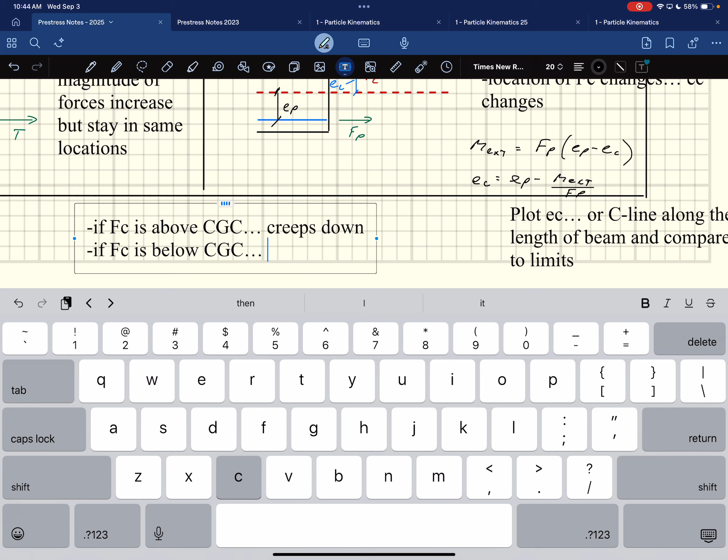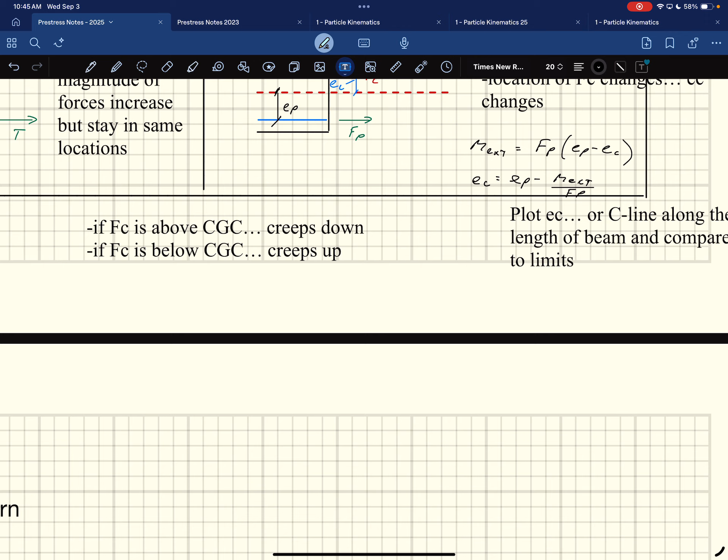Kira, I'd highly recommend watching the video because we had an intriguing conversation earlier about what might be on the exam. I'm going to tell everybody where the YouTube page is. Oh, I thought it was our thing. It was our thing, but word got out that it existed. Gavin knew about it. And Kira wanted me to record today because she had an appointment. I'm going to open it up, but everybody's got to keep coming to class.

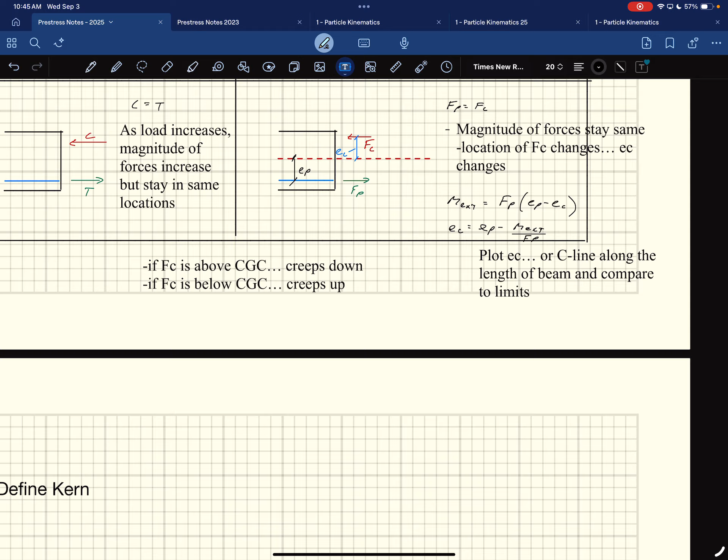I'm going to create a wheel, and we're going to do it every day, just to see who's here, just because it's fun. You don't like that, Connor? I'm gonna put Connor's name on it twice because he doesn't like it.

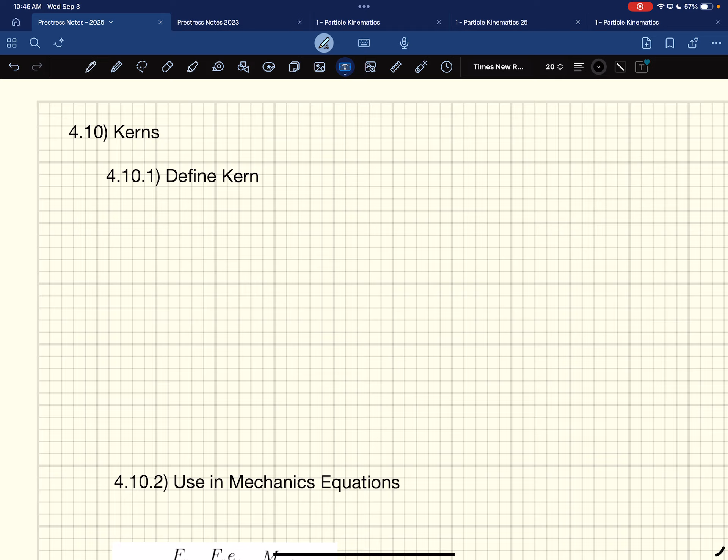Today was funny because I did the name drawing in Dynamics. I dropped 3 names, and afterwards a kid came up saying he came in 3 minutes late and asked for credit anyway, even though I never called his name. His buddies were messing with him, telling him they'd called his name and he'd missed it. So he came up to argue with me, and I told him I think they're just messing with you because I didn't actually call your name. It's a good joke, go ahead and use that one.

Okay, 4 minutes. So, kerns. I hate them, but we're going to briefly talk about them because, one, they get used in other areas, and two, you may hear kerns at some point related to pre-stressed concrete if you go into it. You've heard kern before, is that correct?

No. Kira has. Where'd you hear it, Kira? In the textbook you assigned. Oh shit, yeah, you read, look at you, nerd. But part of the reason I want to do this is Stanton loves the kerns, and they're a property of the beam. Thomas, where'd you hear of kerns? Center third of cantilever retaining wall. Oh really? Concrete, I bet it's related to the same thing.

Yeah, so there's no tension - that's right, it's tied to no tension. It has to do with a case where there is no tension. It also shows up in geotech - there's a discussion of kern somewhere in geotech, right Anika? Yeah, so we're gonna do it here. That's all, because they get used in Stanton's notes, and whenever they get used, it's associated with tension. We'll define them here.

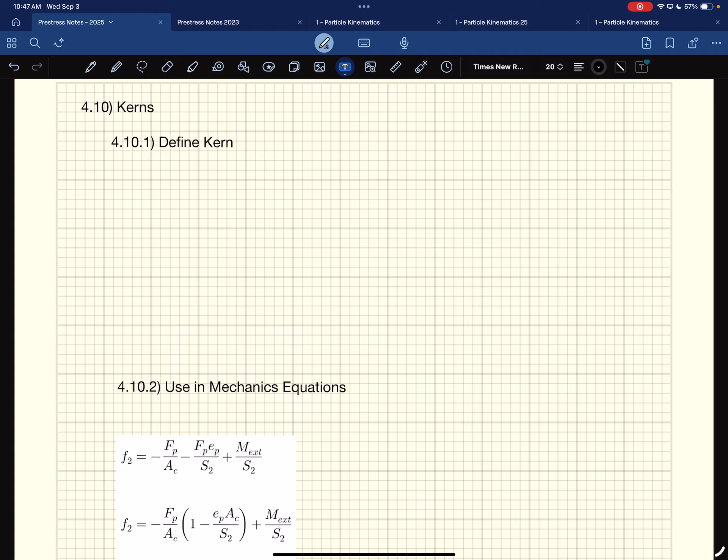And here's our beautiful equation for calculating what these stresses are. Stanton comes in and says, oh by the way, we can slip in this definition of a kern, and then this equation can be simplified down to this other equation. And I was like, well no, I don't like doing it, because I don't know why he does it - it's just because it happens in other texts and stuff. This original one's beautiful because I know this is the concentric effect, this is the eccentric effect, that's the external load - you know what each term is. But with the simplified version, I don't know what any of this is, right? So we lose that clarity.

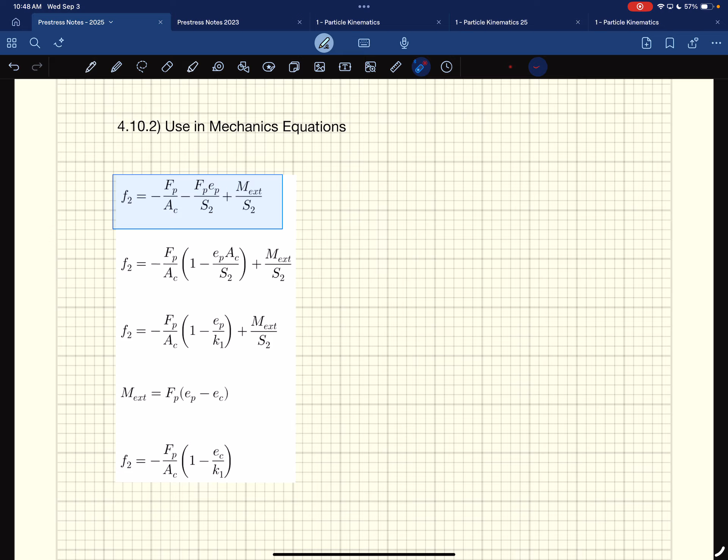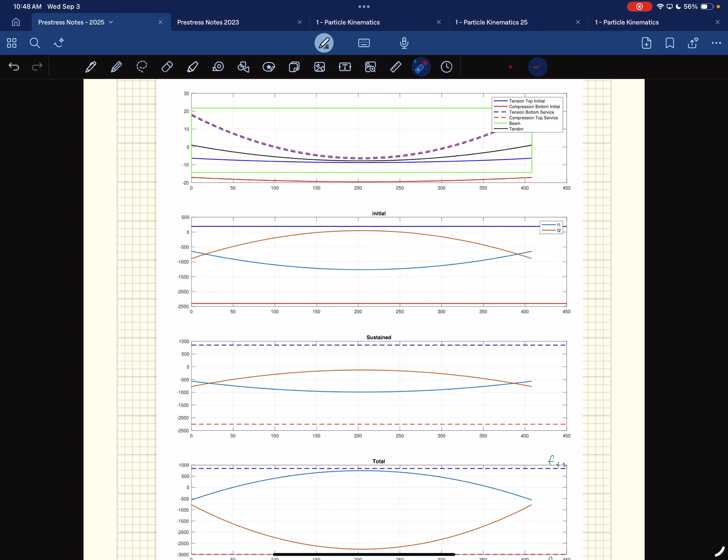Could Chat do it that way? Chat could do it in MATLAB, I'm certain.